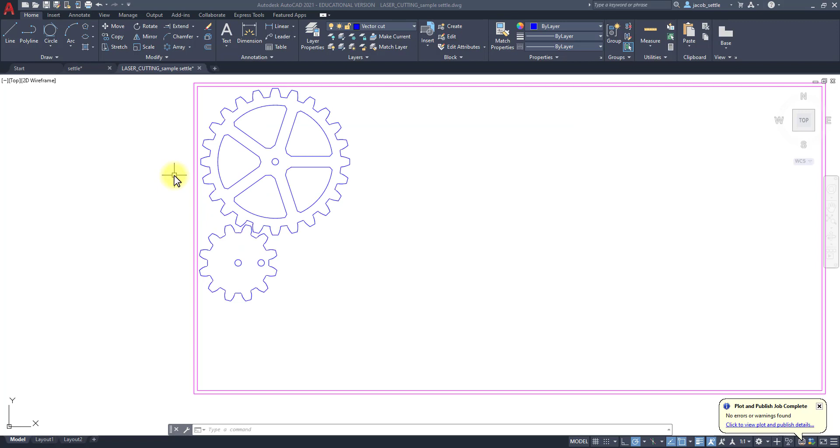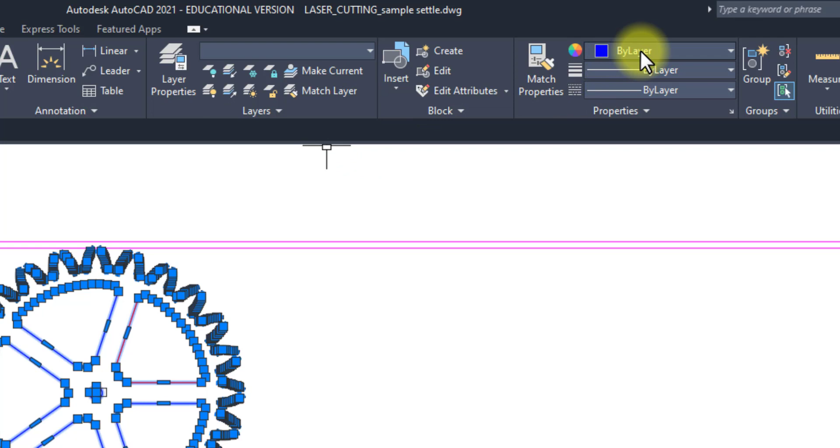First thing we want to do is check our geometry. A couple things I like to do: first, I like to select everything and make sure that everything is on vector cut or vector engrave, whatever that layer is. If you have multiple layers set up, you're going to see this blank. So if I had this piece of geometry set up on vector engrave, when I select this, because you have multiple things set up, that's going to be blank. What's really important is that it's all by layer for your line type and color so that nothing is being overridden. I'm going to change that back. So again, I would just highlight everything and check that.

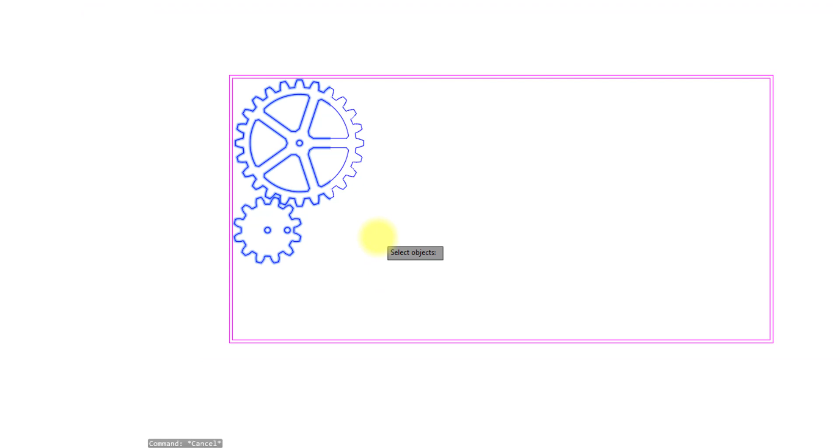With your vector cuts, it's also important to do a tool called overkill. I'm going to type in overkill, select my geometry, right click, and hit OK on this menu. Down here it tells me I have 0 overlapping elements. But if you had multiple copies of that gear on top of one another, you'd send multiple copies to the laser. So now we're ready to go.

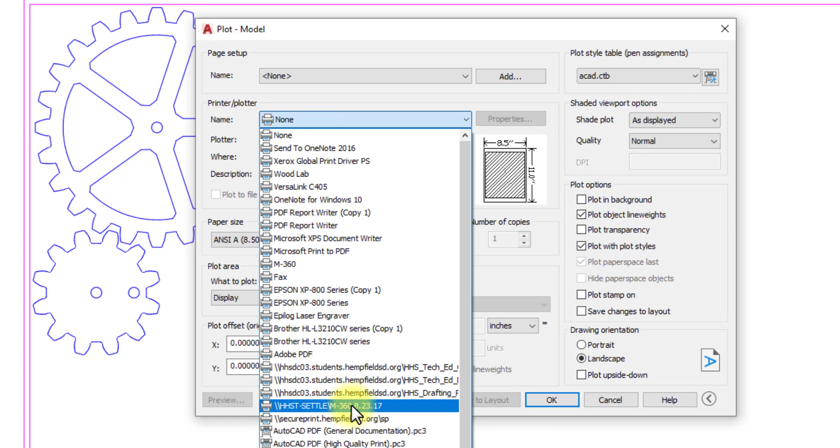We're going to go into plot and select our laser engraver. That's networked through my old laptop, so I'm going to select that. I'm going to always hit default, then go to my window and grab the outermost box here on that window.

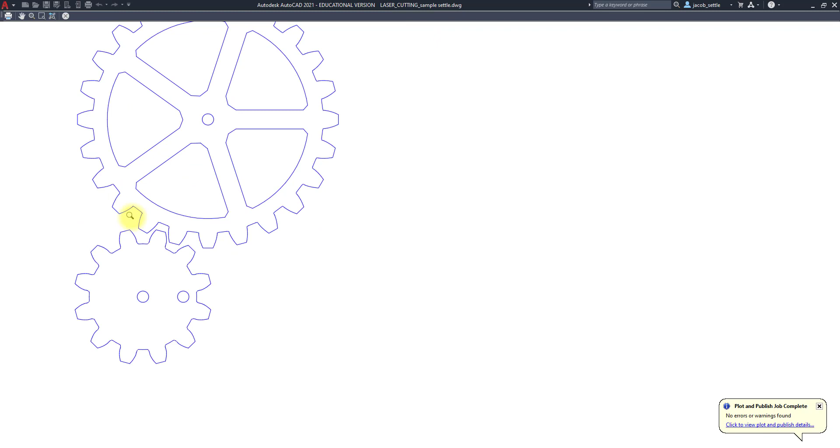Now at this point you want to center your plot. You want to uncheck fit to paper, set scale 1 to 1, and then preview to make sure everything shows up. Notice the pink box that's on no print disappeared, but all the other geometry is good. You want to pay close attention to the edges to make sure there's nothing hanging over the edge on your plot. Then I'm just going to hit escape, or you can right click and exit your print preview.

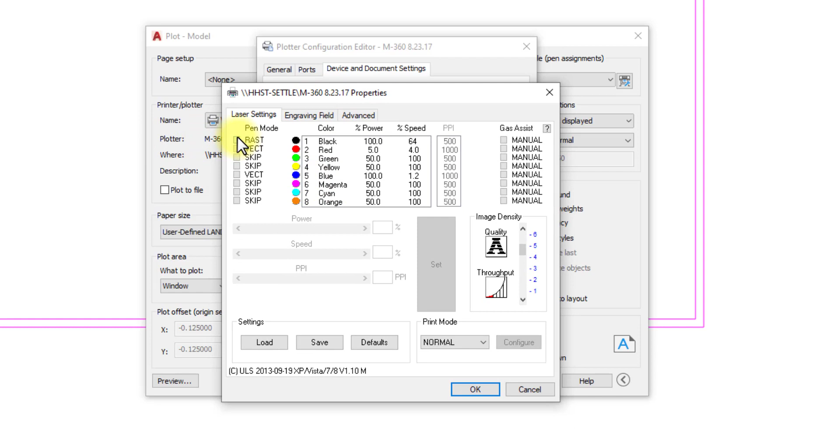This takes you back to this menu. Now at this point we need to tell it what to do with that blue color. So we're going to go into properties, then custom properties, and here's what we're going to tell it to do with blue. I'm going to skip all these other ones, so I'm only working with blue right now.

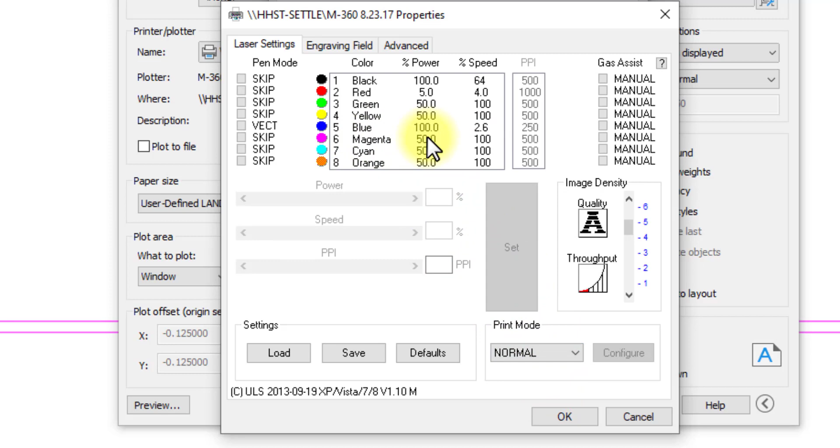I'm going to select power 100, and my speed, this is for 1/8 inch plywood, is 2.6. My pulses per inch is going to be set to 250 for this piece of material. I'll hit set on that, make sure that looks good, make sure it's the only one being cut, and then hit OK three times here. Then I'm going to hit preview, and I'm ready to print. At that point, I right click, go to plot, and send that to the laser engraver.